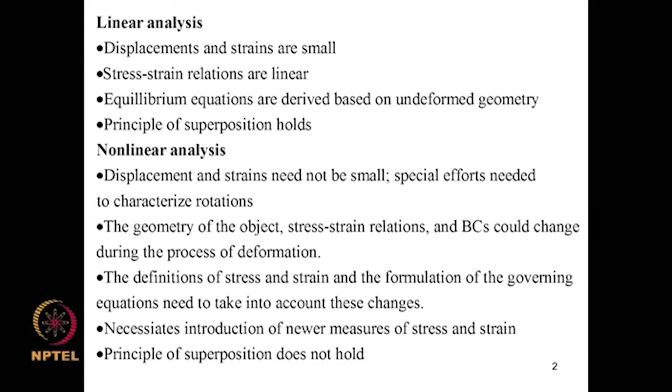Now, we introduced a few strain measures. The infinitesimal strains, we showed that for a body under rigid body rotation, the strains would not be 0. So, we cannot use infinitesimal definitions of strain. Now, new measures are needed.

So, the criteria for establishing these measures, we looked at two such requirements: that rigid body motions imply 0 strains, and then for small strains the infinitesimal strain definitions are restored.

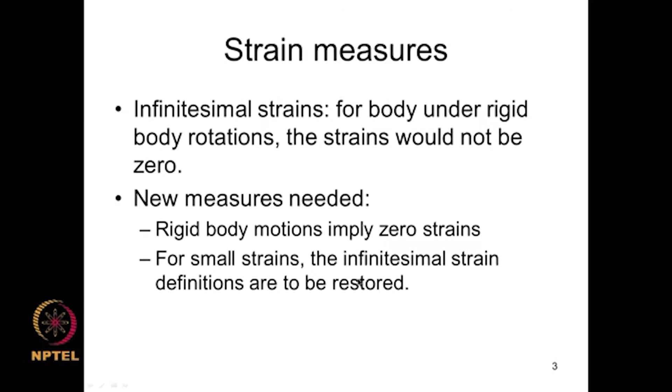That helped us to introduce the Green Lagrange strain measure. dx is F dX, that is the capital dX is the line element in the undeformed geometry. Upon deformation it becomes dx, and f is the matrix that relates them, and this is a deformation matrix.

In terms of the deformation matrix, we consider the change in square of the lengths of the line segments in deformed and undeformed positions, and we obtained this quantity. This quantity E, which is half of f transpose f minus I, is the Green Lagrange strain measure. This is associated with a quantity known as the magnification factor as defined here, and in terms of the Green Lagrange strain measure, this magnification factor is given by this, and this is a measure of shearing strain.

So, if a line element with direction cosines n1, n2, n3 deforms and undergoes a change in length, this magnification factor is expressed in terms of elements of the Green Lagrange tensor. If the line segment is aligned with the x axis, the magnification factor will be E11. If it is aligned along the y axis, it will be E22, and so on and so forth.

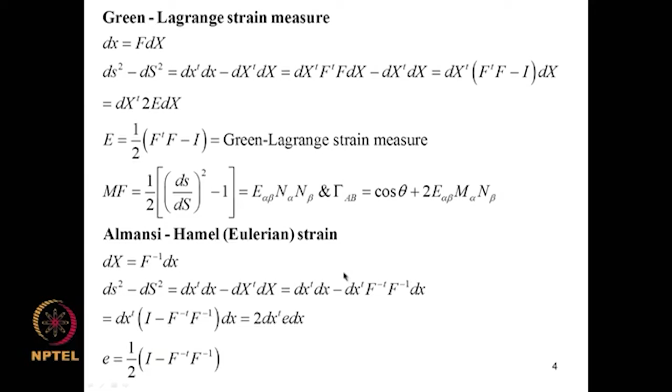Similarly, for the shear strain measures, if one line segment is aligned to the x axis and another aligned to the y axis, then gamma AB gives the shearing strain which is epsilon xy, and so on. This definition was with respect to the undeformed geometry. With respect to the deformed geometry, we get another strain measure known as the Eulerian strain or Almansi-Hamel strain, as shown here.

Now, in literature there are different definitions of measures of strain. Engineering strain is defined as change in length by the original length. Green Lagrange strain is the magnification factor, L square minus L naught square by L naught square. The logarithmic measure is given by this, and the so called extensional ratio is given by this.

So, I have plotted L by L naught on the x axis, and on the y axis these different strain measures are plotted. As you can see, they show different behavior, especially for large strains, and when we are reporting results, this has to be borne in mind.

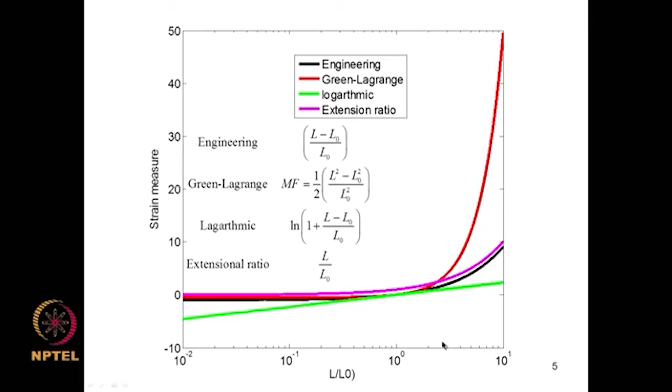The stress measures: the commonly used stress measure is the Cauchy stress, which is defined with respect to the deformed geometry. We define this with respect to the internal forces in the deformed object, with respect to area defined with respect to the deformed geometry, and that looks to be the most natural way of defining stress.

But when we apply this definition to problems of nonlinear analysis, we will not be knowing the deformed geometry in advance. So the utility of the Cauchy stress tensor thus becomes difficult to use in nonlinear analysis. This has necessitated alternative definitions.

There are two approaches to develop measures of stress. One, stress as a measure which conjugates with a measure of strain to produce internal energy. That is one way of looking at it.

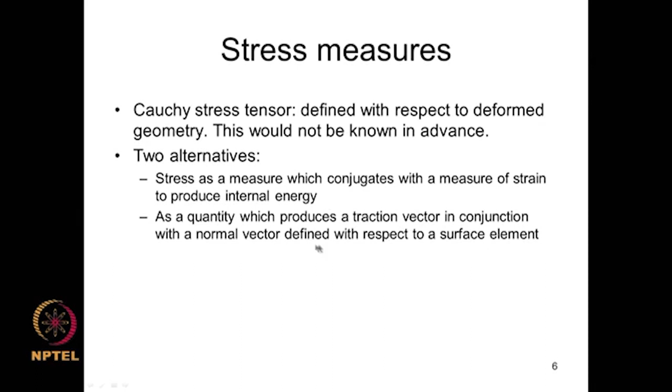The other measure is a quantity which produces a traction vector in conjunction with a normal vector defined with respect to a surface element. Based on this, different measures have been introduced.

The Cauchy-Euler stress based on deformed configuration is given by this. This is a traction vector on a line element with outward normal n, expressed in terms of stress components defined with respect to certain Cartesian coordinate systems.

The first Piola-Kirchhoff stress is based on undeformed configuration. We know how the surface element transforms through this relation, and we define a stress vector acting on element dA with outward normal n, which produces force dF. This force is in the deformed geometry, and we introduce a quantity capital P, defined in the same way as the Cauchy stress. This capital P is known as the first Piola-Kirchhoff stress, and we have seen that it is not symmetric; it has 9 independent components.

The second Piola-Kirchhoff stress eliminates this awkwardness in the stress matrix. It produces a symmetric matrix, and it is based on undeformed configuration. We introduce a pseudo force vector dP hat, which is F inverse dF. This transformation is fashioned after the transformation dx equal to F dX for line elements. Based on this we introduce the second Piola-Kirchhoff stress tensor, which we saw is symmetric, and we also established how these three stress measures are related to each other.

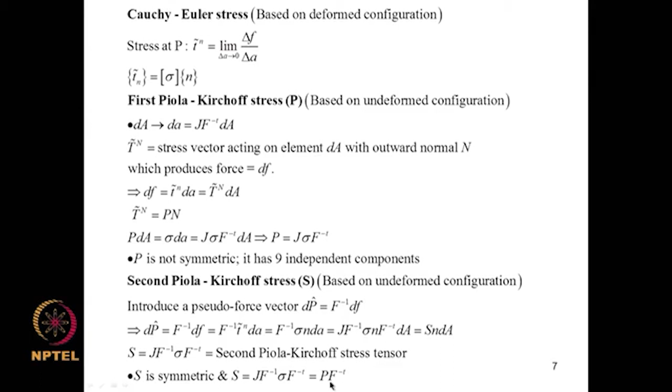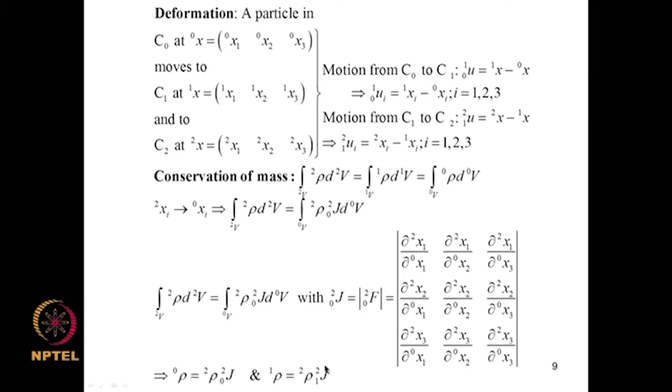Now, by substituting for x2i in terms of x0i, we can show that the law of conservation of mass leads to this requirement between configuration 0 and 2. So this would mean this 0-2 Jacobian is given by this determinant, and we have this relation between densities at various configurations. If this is satisfied, the law of conservation of mass is obeyed.

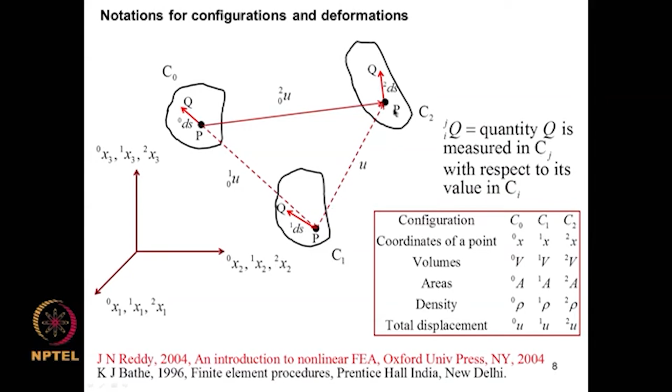The idea is that as we apply the surface traction and body forces, for each increment of the force the body occupies different configurations, and while solving the problem, we will divide the applied loads into small increments. The increment from say C1 to C2 is affected by a small increment in the load. We can linearize the relations when moving from C1 to C2, that is the idea. So that you should keep in mind.

Now this incremental Green Lagrange strain tensor is given by this, and we can define this with respect to the ds in the original configuration. I am adding and subtracting that, and this enables me to write this in terms of the Green Lagrange tensor from configuration 0 to 2 and 0 to 1, and by rearranging the terms I define these quantities Eij, eta ij. These are linear parts of the incremental strain tensor and the nonlinear parts respectively. So this is given by this.

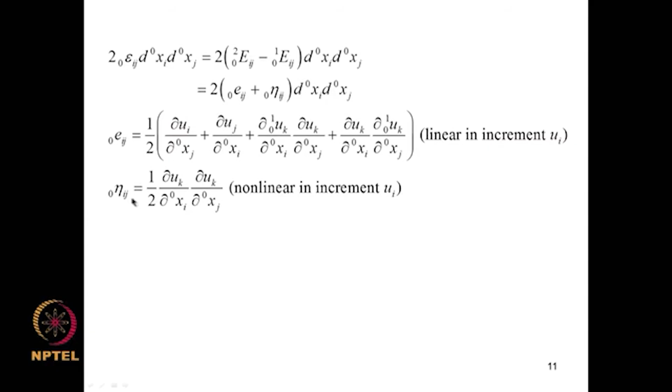So if you use the definitions of Green Lagrange tensor, capital E's, you will be able to show that the strain due to linear increment in ui is given by this, and this is the non-linear increment in ui. So these are incremental Green-Lagrange tensors. This we will be needing in our formulation.

Then the updated Green-Lagrange tensor: you see that the Green-Lagrange tensor from configuration 0 to 2 is helpful in total Lagrangian formulations, where we formulate the problem with respect to quantities in the undeformed configuration. To facilitate updated Lagrangian formulation, we introduce another quantity, this is 2 epsilon ij.

See, this is epsilon ij with respect to 0, but here for the increment from 1 to 2 I introduce this definition, and again using the following results and the deformation matrix for movement deformation from 1 to 2, we get all this, and we get the increments, the linear part and the non-linear part as shown here.

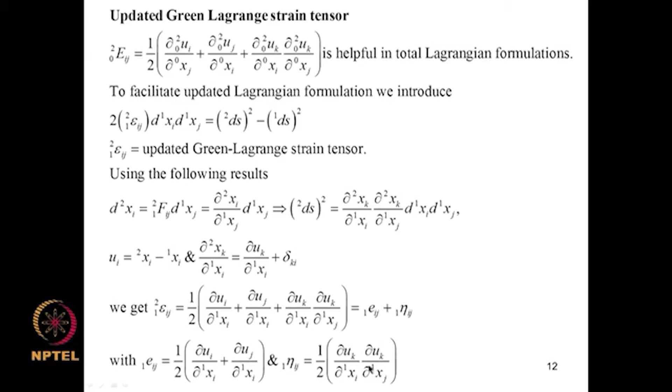Now, the Almansi-Hamel strain tensor or the Euler strain tensor we can consider. If you consider that the body has reached configuration C1 from C0 in several increments, the deformation from C0 to C1 could be large, but we now wish to move to configuration C2. The increment from C1 to C2 is taken to be small, and we could refer to strains with respect to C2. So, that means we are looking at current configuration as in the Euler definition of Euler strain, but movement is from C1 to C2 and not from C0 to C2.

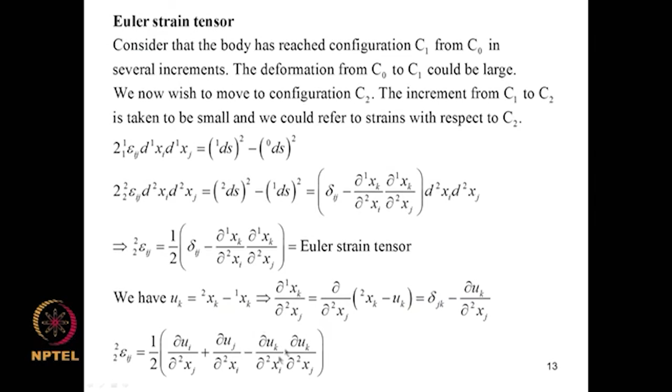So, with that certain simplifications become possible, and we will be able to introduce what are known as Euler strains. This is epsilon 2 2 ij. So, the same configuration, both current and reference configurations are the same, therefore this is Euler strain tensor. Now, this can be again expressed by using definitions of displacement vector. We get this, and the linear part of this is given by this, and we omit now the 2 subscripts and simply write it as 2 Eij, and this quantity is called the infinitesimal strain tensor. So, it is a Eulerian strain tensor, but the linear incremental part.

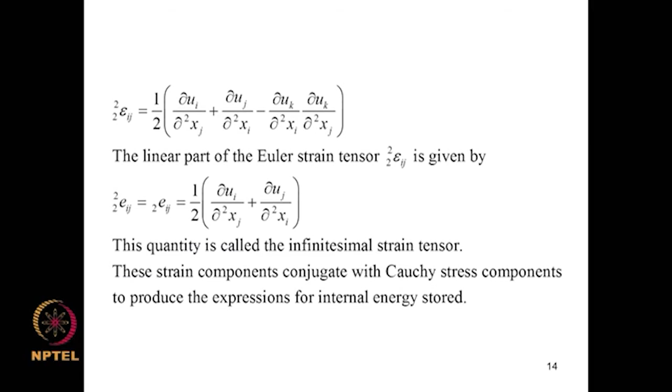The strain components conjugate with Cauchy stress components to produce the expression for internal energy stored. It is clear that Eulerian strains are defined with respect to deformed configuration, and Cauchy stress is defined with respect to deformed configuration. Therefore, one can expect that they will conjugate to produce the internal work done, internal energy stored.

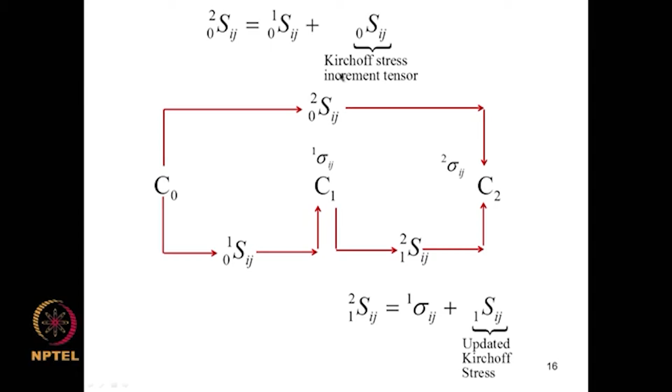So, we have the Kirchhoff stress increment tensor and the updated Kirchhoff stress. That becomes important in our discussions. In the second Piola-Kirchhoff stress tensor, force in C2 is transformed to C0 and area is reckoned in C0. So, this is the relation we get between the Piola-Kirchhoff stress and the deformation gradient and the normal.

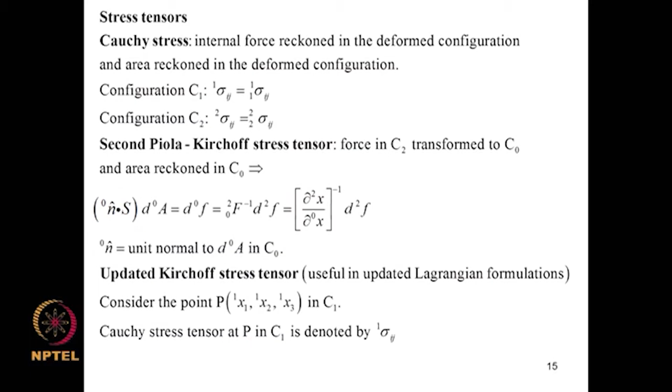Then the updated Kirchhoff stress tensor is useful in updated Lagrangian formulation. Consider the point P, x1, x2, x3 in C1. The Cauchy stress tensor at P in C1 is this, and this is what I am trying to define, and here we have summarized it.

So, this is the Piola-Kirchhoff from 1 to 2 in terms of Cauchy stress plus an increment. This is Piola-Kirchhoff from 0 to 2 in terms of the Piola-Kirchhoff at configuration 1 plus an increment. This is the Cauchy stress in the second configuration, and we know these relations. I am simply putting it in the initial notation. So, this is the relationship between Cauchy stress and the second Piola-Kirchhoff stress, and this is the relationship between the second Piola-Kirchhoff stress and the Cauchy stress.

Now, since we have conservation of mass, we have seen that this relation must hold good. We can also express these relations. Instead of writing the Jacobian, I can write the ratios of masses and get this relation. This is the same as before, except that the Jacobian is written in terms of ratios of masses.

Now, what is the relationship between Cauchy stress in C2 and updated Kirchhoff stress? That means I want 2-sigma-ij in terms of updated Kirchhoff stress. So, if we consider the second Piola-Kirchhoff from 1 to 2, this is given by this, as you have seen, and this is the relationship between the Cauchy stress in the second configuration with the S from 1 to 2.

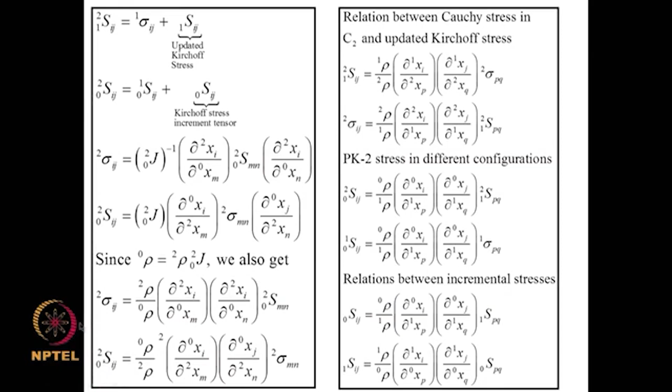Now, this PK2 stress in different configurations we can write using this relation explicitly, just for reference I have given it. Then the relationship between incremental stresses: Sij at 0 and S1 PQ, this is how they are related. This is fairly simple. If you sit with a pen and paper, you can easily understand, but all these relations would be needed as we proceed.

Now, for the discussion in this lecture, we are limiting our attention to linear relations between conjugate stress-strain pairs. Material behavior is elastic, meaning constitutive behavior is a function of current state of deformation, and the loading-unloading path will be identical. Upon removal of the load, the original configuration will be restored.

Then the relationship between Piola-Kirchhoff stress and Green-Lagrange strain is defined through the quantity Cijkl, where C is the material elasticity tensor. The stress-strain relations in an incremental form we can write in terms of this: this is the Kirchhoff stress increment tensor, epsilon KL is the incremental strain, and this is the C matrix. Similarly, the updated Kirchhoff stress increment and Green-Lagrange strain increment can be related through this relation.

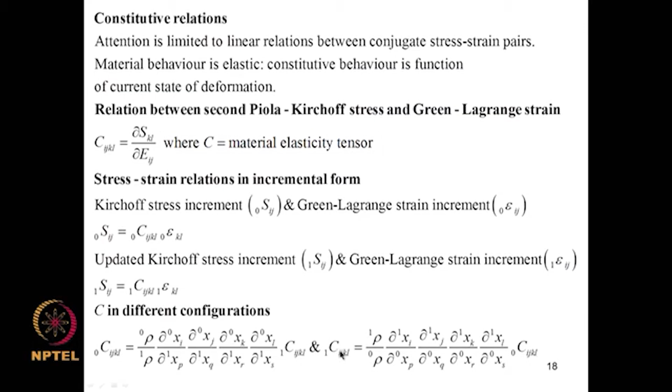Now, C in different configurations can be written in this form. This is C in the first configuration related to the 0th configuration, and this is the relation the other way.

Now, the formulation of the finite element in this case will be based on the principle of virtual displacements. What it says is the sum of virtual external work done on a body and the virtual work stored in the body should be 0. So, if you consider configuration C2, the virtual work is the Cauchy stress into the Euler strain, virtual Euler strain, integrated over the volume in the second configuration, and this is the contribution due to virtual displacement from the surface, this is body forces, this is surface traction.

Now, this in the indicial notation is given in this form.

Now, we cannot use this equation directly. See, here we have used the Cauchy stress and the Eulerian strain, that means both of them correspond to the deformed configuration, so it looks nice. But as I already said, the description of the configuration C2 would not be known.

So, we cannot use this equation directly. The configuration keeps changing as the deformation evolves, but in a linear analysis you can quickly recall the assumption that the configuration of the body does not change, so equations can be formulated based on undeformed geometry. This is not valid in nonlinear analysis.

This calls for introduction of measures of stress and strain which take into account changes in configuration during deformation. This point I have made a couple of times already. This enables the evaluation of integrals in the expression for the internal work done over a known configuration.

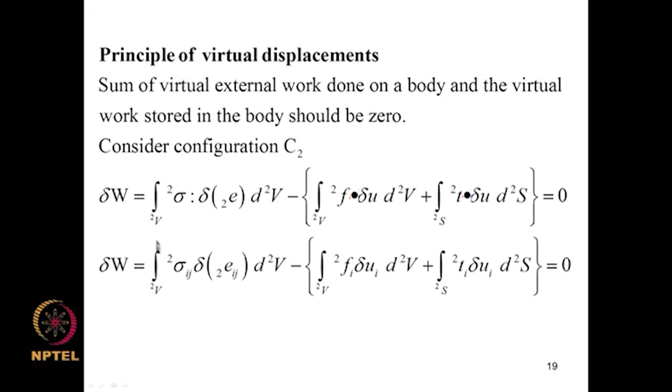By introducing the alternative measures of stress and strain, what we will be doing is we will be able to evaluate these integrals with respect to volumes in known configurations. So, that is another way of expressing the need for alternative definitions of stress and strain.

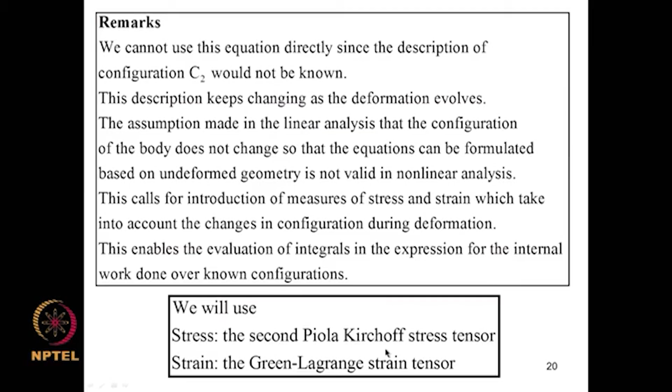So, in our lecture we will use stress as the second Piola-Kirchhoff stress tensor and the strain as the Green-Lagrange strain tensor. They are conjugate in the sense that they produce the internal work done. This I have mentioned in one of the previous lectures.

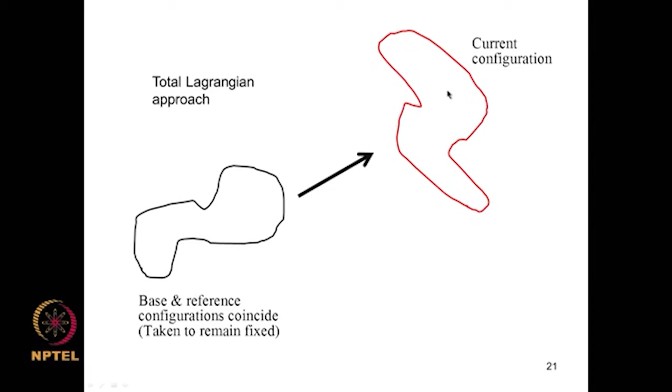In the total Lagrangian formulation, the base and reference configuration coincide and are taken to remain fixed, and this is the current configuration, but all equations are formulated with respect to the reference configuration. Whereas in the updated Lagrangian approach, the reference configuration is updated with each increment in the load, and we analyze the incremental displacement with respect to a reference state that keeps evolving as the loads are incremented.

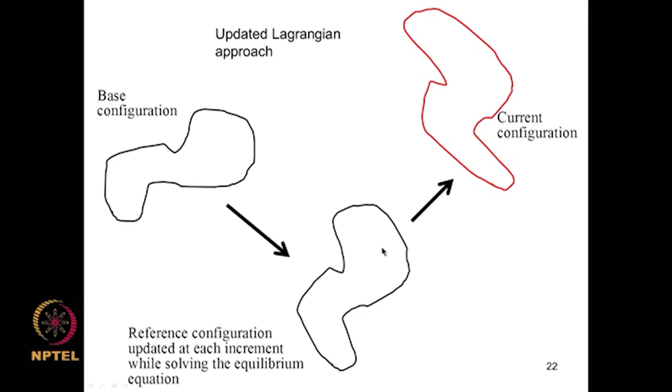So, let us take a look at the total Lagrangian approach. Here all quantities are reckoned with respect to the undeformed configuration.

The virtual work statement leads to these terms. These are the terms that are present in the virtual work statement. If you see here, we have to analyze each one of them now.

So, this is the Cauchy stress into the virtual Eulerian strain, and now this is the second Piola-Kirchhoff stress and the virtual Green-Lagrange strain. These are identities, so that they should be equal is an identity. So, nothing is gained or lost.

So, this is the term involving body forces, this is the term involving surface traction, and this is the virtual work statement of the virtual work principle in terms of second Piola-Kirchhoff stress and Green-Lagrange strain measure, and all volumes are now in the 0th configuration. This is 0V and this is surface in the 0th configuration.

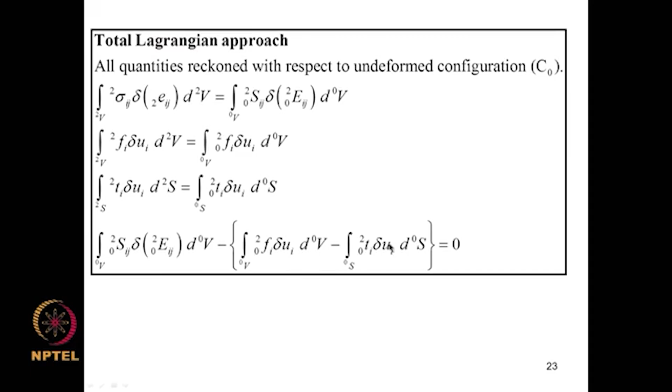Now, our idea is to work with this and develop a weak form based on which we can develop a finite element model. As I already said, we are going to take an incremental loading approach. So, as the load is incremented by a small amount, we wish to deal with linearized stress strain relations, and to formulate that we have to get into many details.

So, in this approach we will not formulate a nonlinear set of equations and then develop an independent solution strategy. The solution strategy is embedded into the development of the finite element model itself. So, we have this statement.

Now, we start working with the second Piola-Kirchhoff stress from 0 to 2, expressed in terms of PK2 from 0 to 1 and the Kirchhoff stress increment. So we will consider each one separately and then look at these quantities in terms of increments and certain reference values.

So, the 0 to 2 Green-Lagrange strain tensor is written in terms of 0 to 1 plus these incremental quantities, and therefore, for the virtual strains you use the delta operator and you will get this. Now, delta of Eij01 is 0 because this does not depend on the unknown displacements. The unknown displacements are the increments, therefore this will be 0 and I get this.

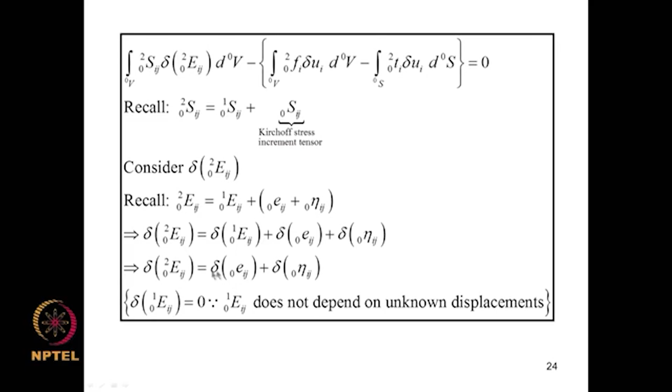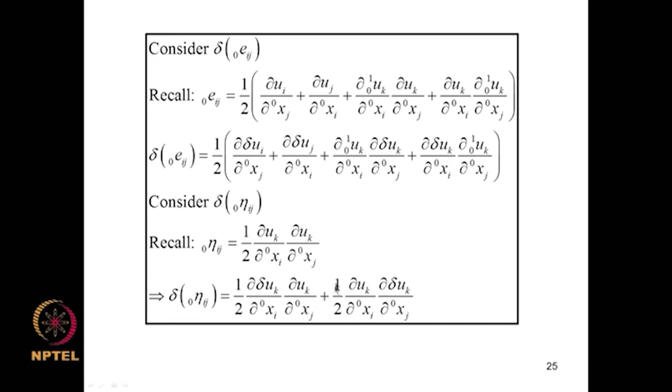Now, we have the expression for this quantity E0ij, that is this, and therefore I will be able to compute the variations for the linear component and non-linear component. So, this is a matter of derivations that you have to absorb.

And similarly, this. The contribution from body force and surface traction is denoted as delta of 0R2, and that is given by this.

Now, let us consider this part and write the 0 2 PK in terms of this, and we will expand this, and this virtual strain also is written in terms of the increment, and as we multiply, we get one of the terms as Sij01 delta of 0Eij d naught V.

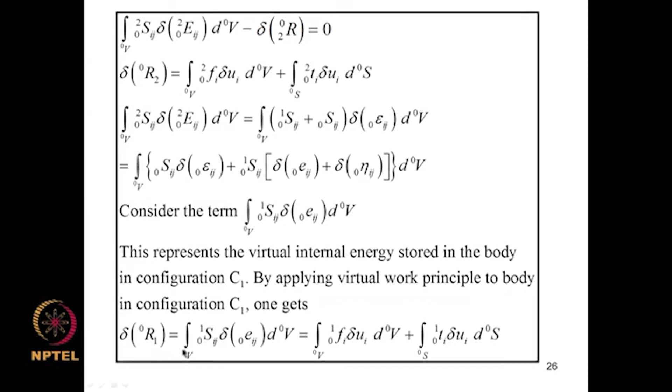This quantity represents the virtual internal energy stored in the body in configuration C1. Now, by applying the virtual work principle to the body in configuration C1, we can show that this quantity is given by the body force and surface traction contributions in configuration 1.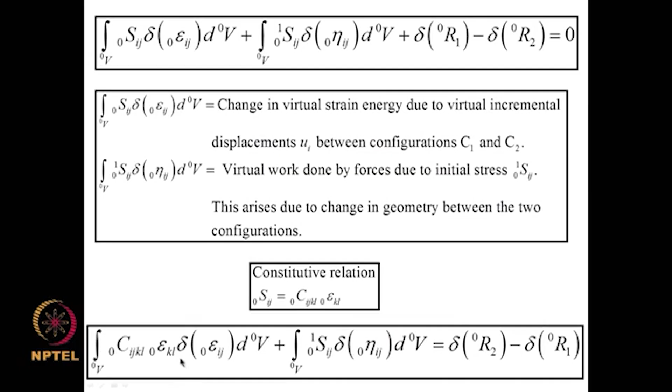Now we need to introduce the constitutive relations. So the constitutive relation we use in the incremental form is as shown here, and that leads to the equation that forms the basis for developing the finite element model.

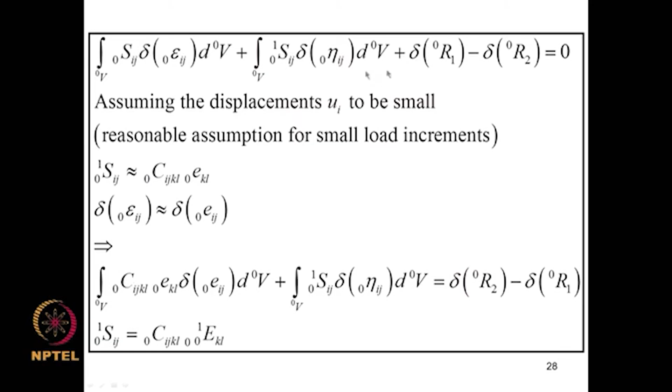Before we jump into that, we can simplify this further. If we assume the displacement ui to be small, that means the increments are small. If load increments are small, the displacement increments are also small. If we assume that, I can simplify and remove certain nonlinear terms, and the constitutive law can be expressed as shown here, and consequently the virtual work statement gets further simplified to this form.

Now, I have not talked about inertia forces till now, but if inertial forces are present, and I am not going to discuss this at least in this part of the lecture, we can quickly see how we can deal with this if such terms were to be present.

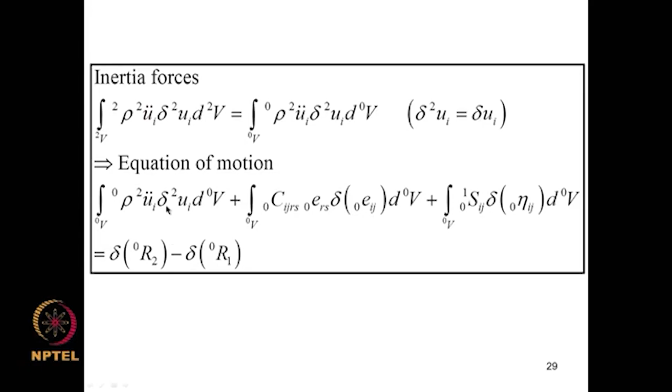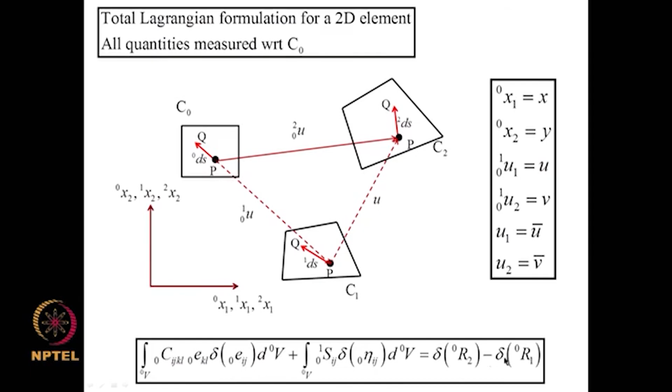So this is the weak form that we will have to use to formulate that.

What follows is we have to now convert all the expressions into expressions in terms of incremental displacements, and the incremental displacement needs to be interpolated in terms of nodal values. Once that interpolation form is established, we return to this equation and get the finite element model. That is the story.

So we have 0 e as this, and in terms of incremental displacements, it is given by a linear part and a nonlinear part. This is still linear in u bar.

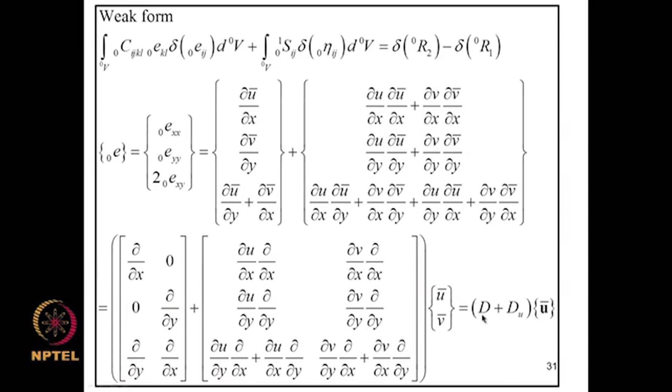So we get this equation, this is in the matrix form. We introduce d and du, and this is u bar.

So this is a relationship between strain and the displacements, and now if I substitute that into the terms in the virtual work statement, we can simplify the first term in terms of this representation, and we get this term simplifies to this, where this matrix is the elastic C matrix that relates stress and strain. We are assuming in this formulation that it is an orthotropically elastic material.

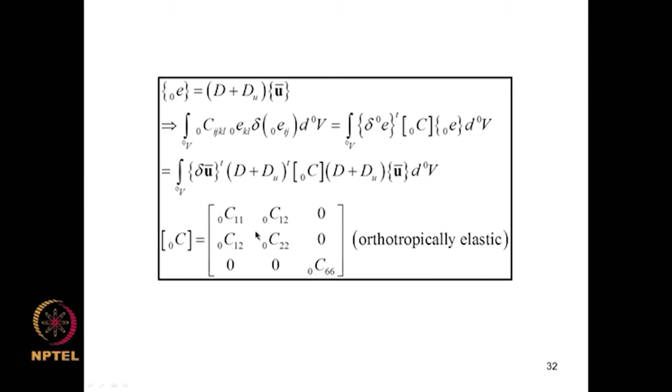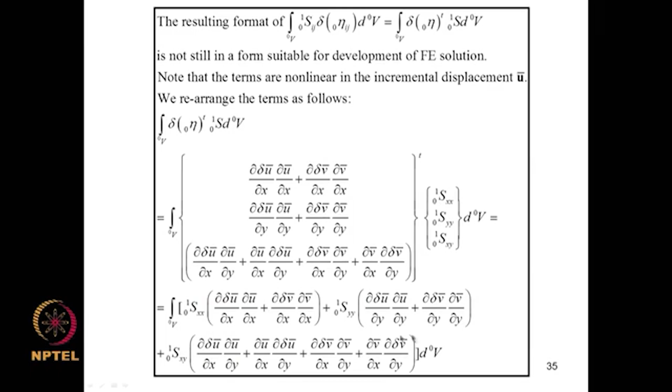Actually, the resulting format of these terms is still not in a form suitable for development of the FE solution. We need to reorganize these terms, so that requires introduction of certain vectors, and we write the stress matrix in terms of a vector like this, and these coefficients in this form. We multiply them out, and if we do that we will be able to get the expressions in this form. Some of these details you need to absorb.

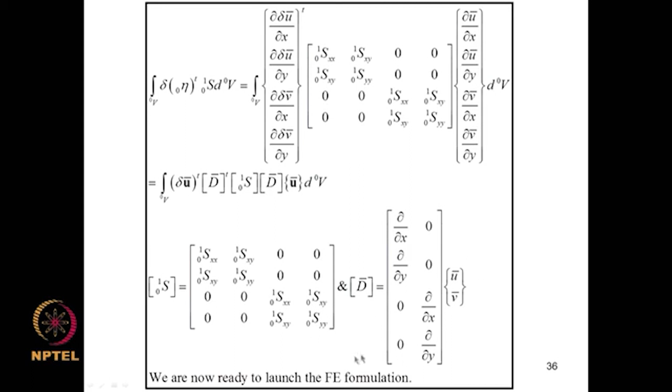Once you are done with this, we are now ready to launch the FE formulations. So what we do is the incremental displacement u bar v bar is interpolated in terms of n nodal values. Psi j's are the interpolation functions, and this is written like this, and the total displacement is also represented in the same form, which is this.

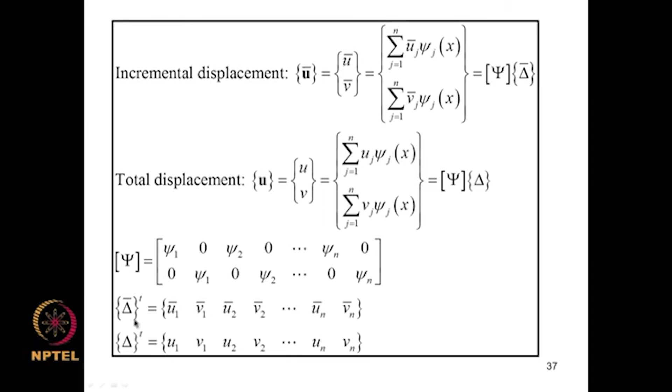So I have the capital Psi matrix, and delta bar vector and delta vector as shown here, and then we get into the principle of virtual work statement, and we consider each term and make these substitutions, and then assemble all of them and obtain the final finite element equation. So we start with this.

So we have now already derived the terms, this delta E naught in terms of u bar as here, and that we are using here, and here I am now making the substitution for u bar in terms of the assumed shape functions, that is this, and we introduce a matrix BL, which is d plus du into psi.

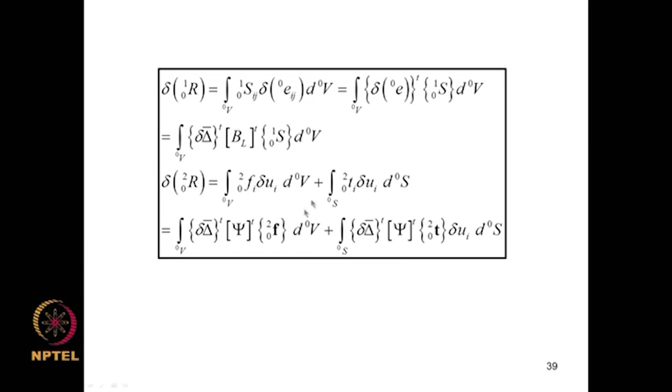Similarly, the other terms we simplify and we get BNL and so on and so forth. Body force and surface traction terms are also simplified in the same vein, and that leads to the weak form and the finite element equation. The KL is this, KNL is this, and these are the forcing terms. You can spend some time and go through that.

Some observations we can make: this K matrix is symmetric, because these matrices are symmetric. The material constitutive matrix is symmetric, and this S01 is also symmetric. Also, as already said, this is an incremental formulation, so the stiffness matrix here is the tangent stiffness matrix, meaning linearization is already implied in our formulation.

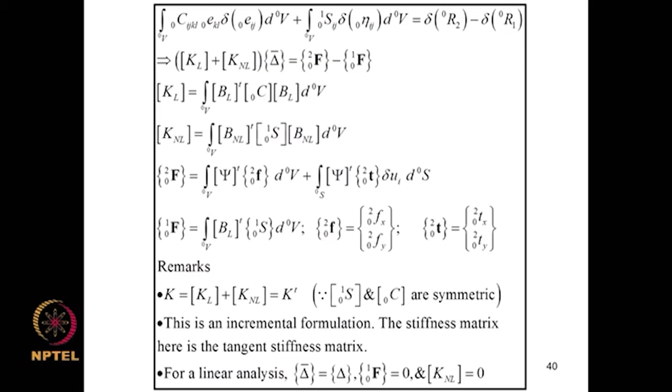However, we can still note that if we were to do an out and out linear analysis, this delta bar will simply be delta, and this quantity will be 0 and KNL will be 0. So this reduces to the linear stiffness matrix if we are not including nonlinear behavior.

We can go through the details of these formulations and derive the expressions for different components of these B matrices as shown here, and proceed to write these equations so that the elements of these matrices can be evaluated. I am not going to get into these details.

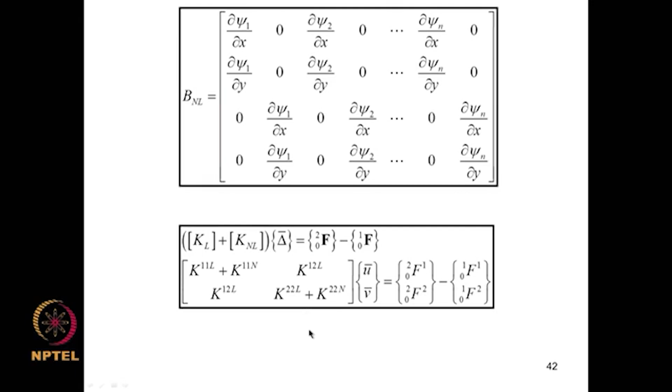I will stop the discussion on total Lagrangian with this. We can quickly take a look at this updated Lagrangian approach.

Here all quantities are reckoned with respect to the latest known configuration, that is C1. The quantities are now the Cauchy stress in configuration 2 and the Eulerian strains; the increments are related through this, and this is the relation for body force, this is the relation for surface traction.

Here this epsilon ij 1 to 2 is the updated Green Lagrange tensor. This fi 1 to 2 is a body force referred to in C1, and this is surface traction referred to in C1. So we can now rewrite the virtual work statement in this form.

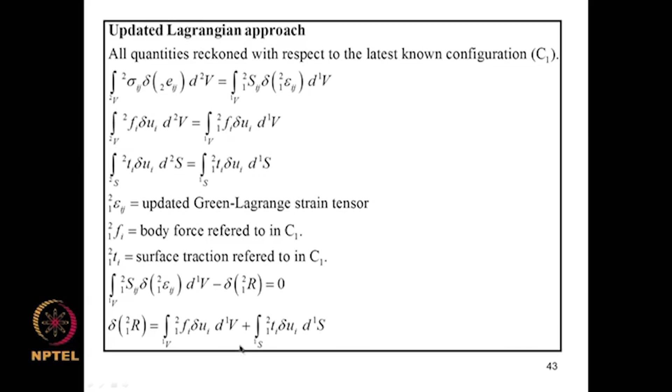Now using the definitions of the strains, we can derive the virtual strains for linear and nonlinear parts, and the Piola-Kirchhoff stress from 1 to 2 is decomposed into Cauchy stress in configuration 1 plus updated Kirchhoff stress. So if we substitute and simplify, we get the...

We are aiming at getting the weak form appropriate for this model. So, this is the weak form.

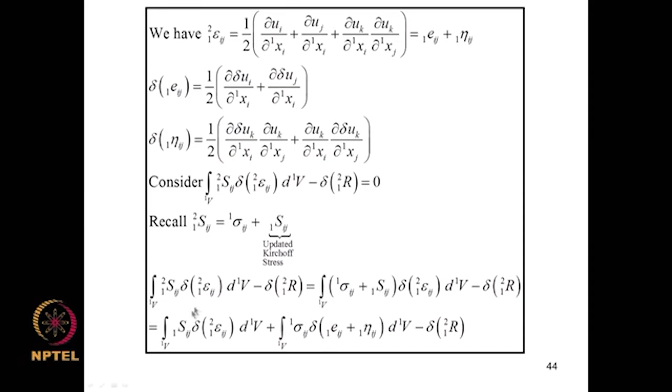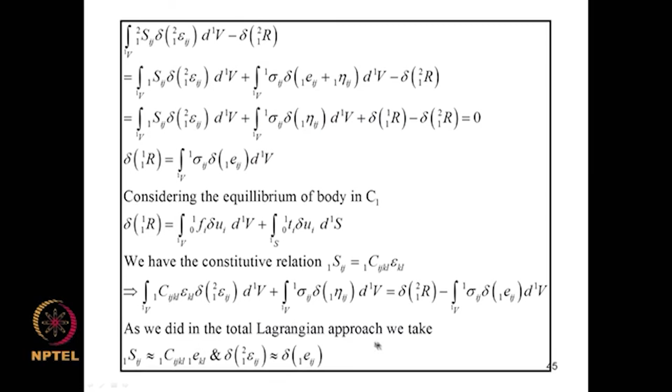Now we are going to use the virtual strain expressions, and if we consider the equilibrium of the body in C1, this is the principle of virtual work applied to that. From this, if we now use the constitutive relations, we get this equation, and as we did in the total Lagrangian approach, if we now linearize we get these equations, and this leads to the required weak form that forms the basis for development of the finite element model.

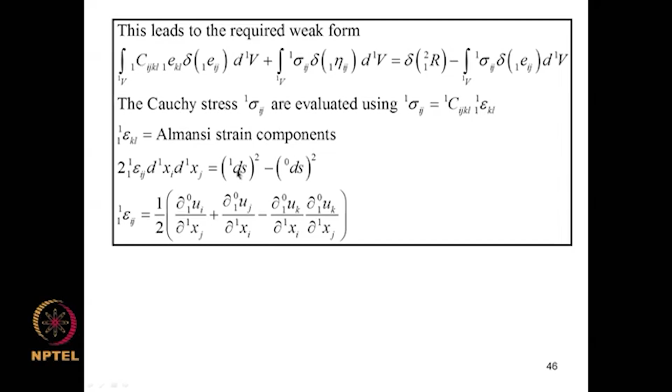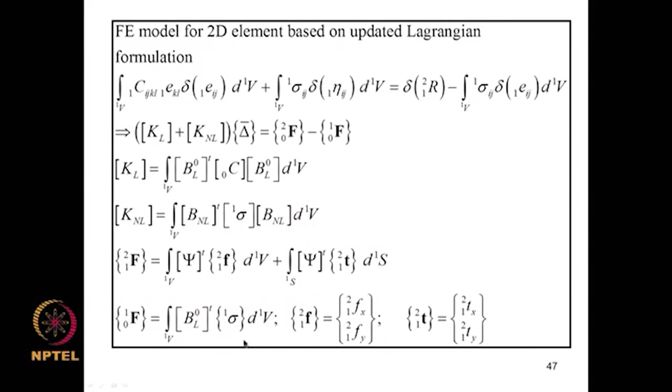I have not given all the steps, but we can use the updated Lagrangian formulation and derive the finite element model for the 2D element based on the procedure we used for total Lagrangian, except now we take care of the fact that we are dealing with all quantities in configuration 1 instead of 0. I have reproduced here the basic equations and the various matrices that arise in this formulation.

As I said in the beginning of this lecture, the objective of this discussion has been basically to provide a flavor of how to carry out nonlinear analysis, what issues arise as the geometry of the body changes during deformation, why we need to introduce newer definitions of stresses and strains, and consequently what role these newer definitions play in the formulation of the FE model.

Now, with this we have come to the conclusion of this course. So, in the next lecture what I wish to do is to quickly review what we have done so far and where we can go from what we have learned till now.

Now, the material covered in the course - from the coverage we have already achieved, we can move on further to study problems of material nonlinearity. I have not addressed this issue in most of the discussion that we had.

To study this you need to first understand theory of plasticity, and continuum mechanics has to be generalized to allow for nonlinear material constitutive laws, and that requires further preparation.

In our discussion of stability analysis, we have included geometric nonlinearity, but there are different layers of sophistication possible. We could deal with modified definitions of stresses and strains and the updated Lagrangian, total Lagrangian approaches, and investigate the problem of stability once again and see what we achieved earlier without being aware of these refinements.

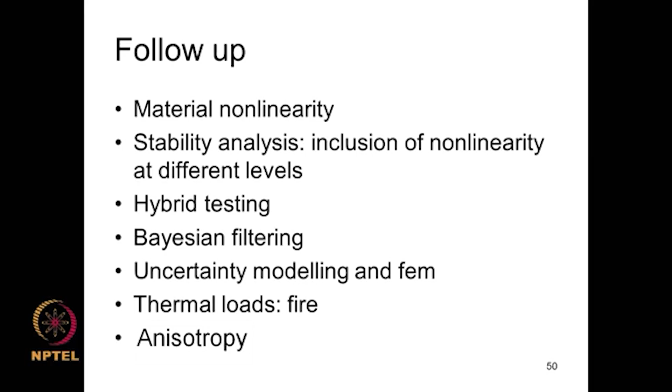So what I will do is we will close this lecture at this point. In the next lecture I will briefly review the whole content of the course and again revisit some of these questions with slightly more detail. So we will close this lecture at this point.